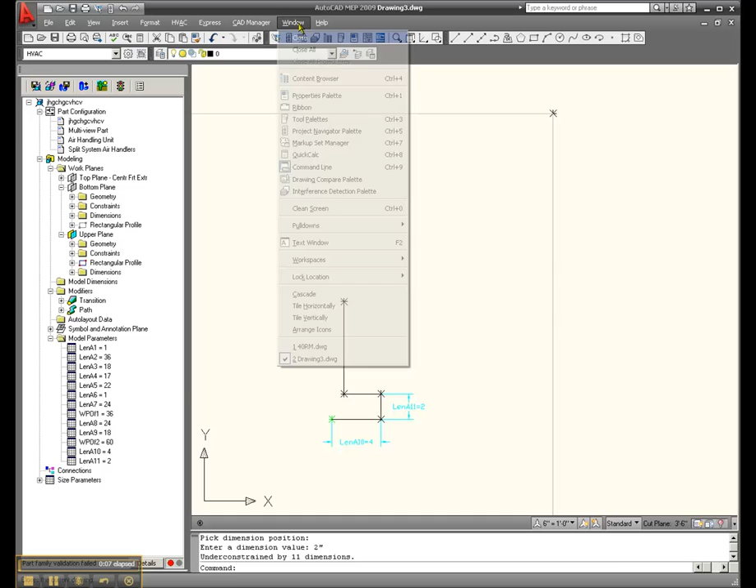Okay, so we've now defined the center point of the upper extrusion, and that upper extrusion is what? Maybe 14 inches by 10 inches or something like that. So let's go and dimension this guy. So horizontally, right here, let's put that dimension right there, and we'll call him 5 inches. And do another dimension, it's a vertical one. That one's 7 inches. Okay.

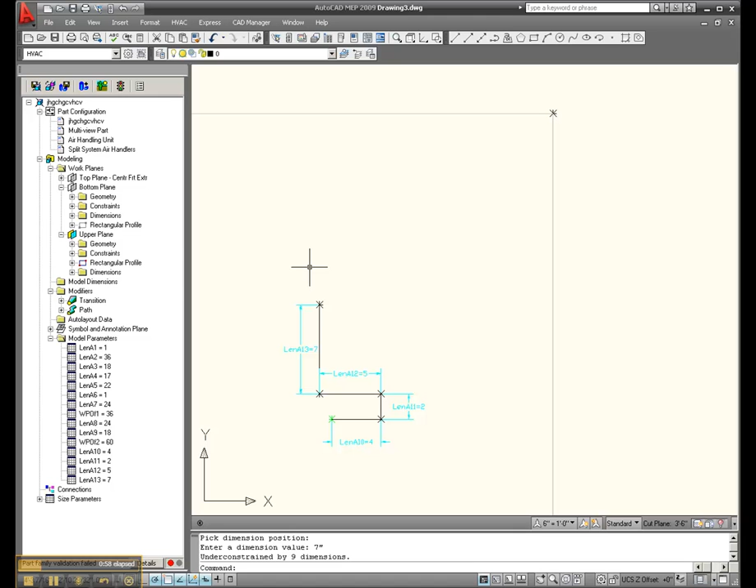So now we can make our profile, now that we've determined the distance to one of those outer corners. So we're going to go from here. We're going to come back this way. We're going to say select first corner is at 10 inches, comma, minus 14 inches. Bingo. So he matches up with the center point of that guy. And we've worked backwards to a leg.

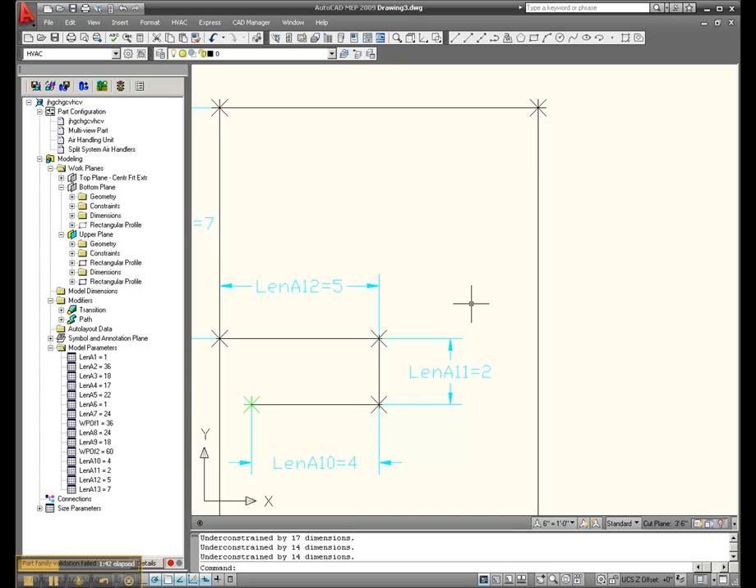I like to keep these center points there because when we go to add connectors, I like to know my connectors are at the center. Just a graphical way of showing me, and you know, we could have always come from here straight backwards and over to this edge point. This gives me a little more control over dimensions and stuff. So we're going to put formulas to all this so that it all works out all the time. Alright.

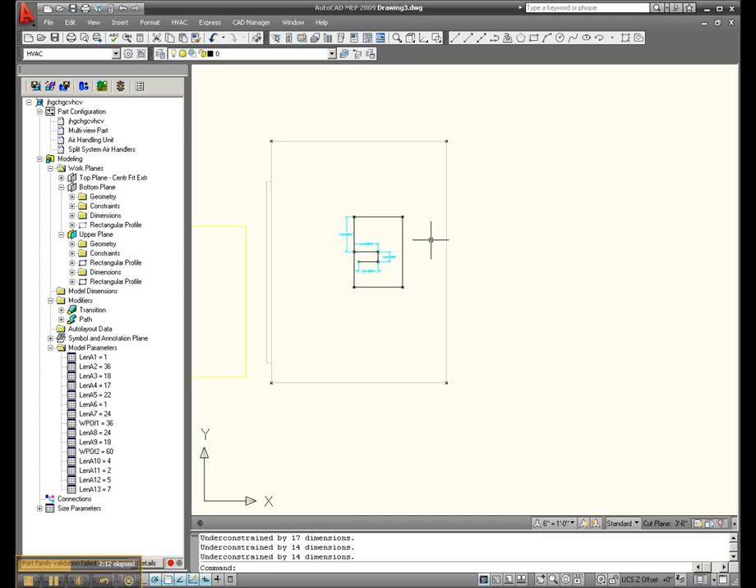Now let's extrude this profile. Let's go back to a southwestern ISO view. Okay. Come back here to modifiers, right click, and this time, you know, we did a transition for the main body. We did a path for the side extrusion. We're going to use extrusion on this one. Select profile, right there, and we're going to do a blind extrusion. And the distance, we're going to say is 1 inch for now. Bingo. So it extruded it up by that much.

Now notice, it did not give us a height option. I don't think it did. 11, 12, 13. I see 13 down here. So I think that blind extrusion is probably not a good choice for us. It does not create us a parameter that we can control the length of that extrusion. So let's go back and delete that. Let's try a couple different choices there.

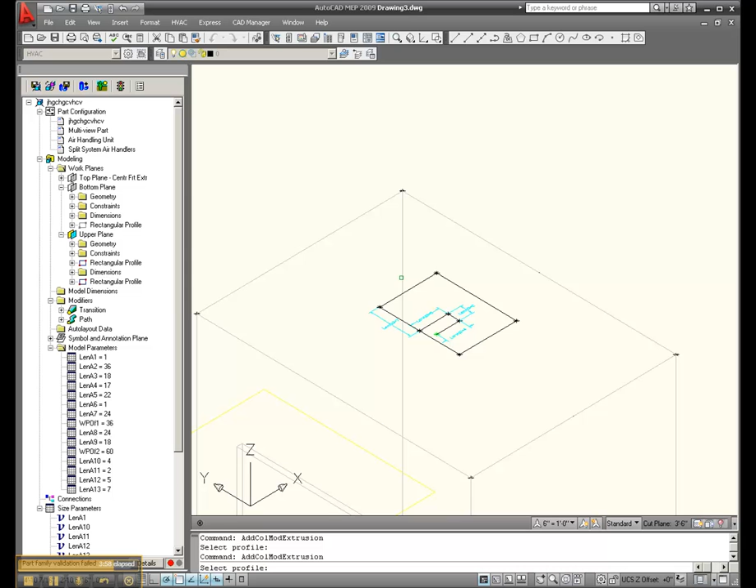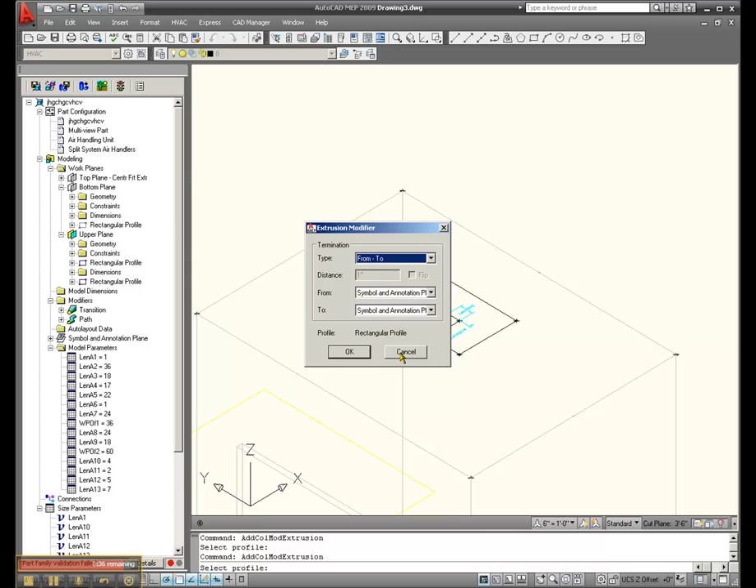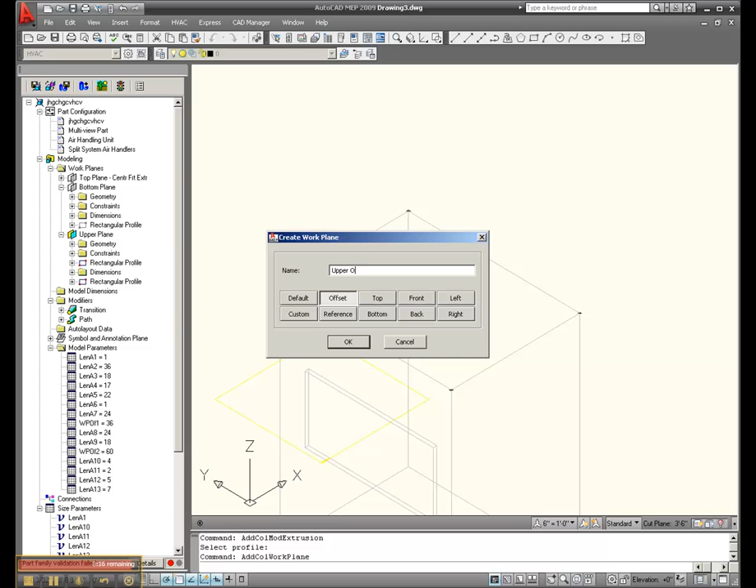So maybe we shouldn't do this. So let's not use an extrusion because you can't later dimension the length of it. What we'll do is we'll just make another offset plane to this guy. So let's come back up here to work planes, add work plane, offset. We'll just call this one upper offset. Why not? And we're going to do it based off of this guy, and we're going to come upwards by 1 inch. Boom. So let's do the same thing that we did on the last